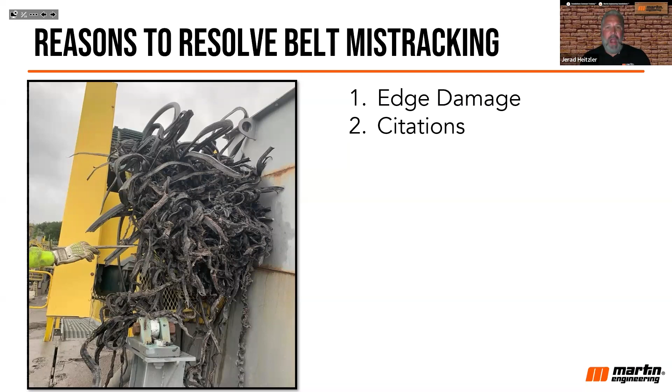Second is citations. We've recently heard from facilities we've consulted for that they're getting citations when inspectors see cords wrapped around the rollers of a conveyor belt. If you're walking along your facility and look at the carrying idler or return roll and see cords from the belt wrapped around that roller - I'm sure nobody here has such an issue, but if you do, there's been recent reports of citations from safety inspectors. We've got to recognize that letting a belt mistrack can cause problems that lead to citations from inspections.

Third, and probably one of the most problematic things with letting a belt mistrack, is the spillage you'll get at the load zone. If that belt wanders off to the side, the material being loaded onto the belt is either going to off-center load or miss the belt completely, causing a tremendous amount of spillage. That spillage causes increased cleanup costs, maintenance costs, and radically increases the cost of operation.

Fourth, the belt can damage the structure of the conveyor. That structure is really critical, and we want to make sure we protect it. Now, I want to share this photo with you - if you look at the bottom right of the screen, let me blow this up for you here, one second, let me get you a better look of this photo.

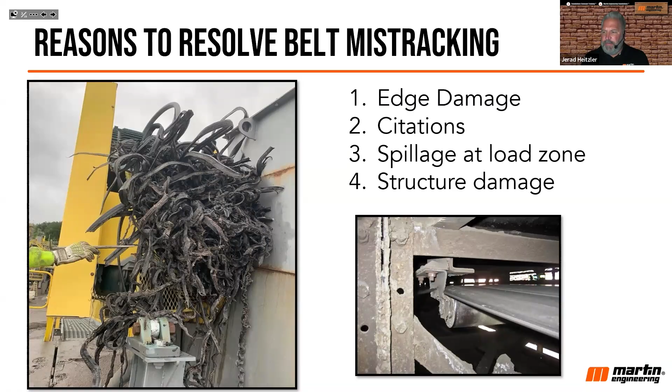You can see in this photograph that this belt has wandered and rubbed into the bracket that holds the return roll. Eventually, that could wear down the bracket completely, causing that roll to fall unexpectedly, which is a huge safety concern. I'll share a story with you that I received maybe a month ago.

There's a company, and I won't say which one - I had one of the safety managers call me up and ask about guarding a return roll. He shared a story of a return roll that fell from the bracket because the bracket was damaged from belt mistracking, and it just narrowly missed hitting one of their workers down below. So we've talked about how belt mistracking can be a problem, but again, we've got to recognize it can be a catastrophic problem.

So let's talk a little bit about solvable and unsolvable mistracking. Now, really, by definition, there's really not instances where a belt can't be tracked. However, I'm going to give you an example of when it may not be in your best interest to solve a belt tracking problem using the procedure that I'll talk about.

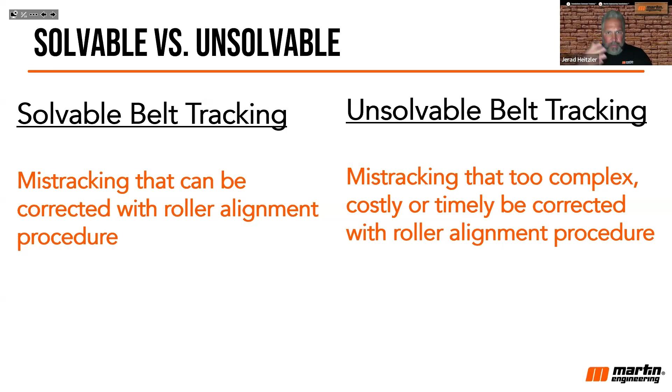Finally, there might be instances where you just can't take the time to thoroughly go through this procedure because of its complexity. So let's talk briefly about the roller alignment procedure.

The first step in this procedure is to identify where the low tension area of the belt is. We want to identify this because the belt, when under lower tension, has more contact with its rolling component. If the belt's under high tension, under a lot of stretch, it doesn't make as thorough contact with a rolling component.

So we're actually more effective with our tracking, we have more influence on the belt when we deal with rollers located where the belt is under low tension. Low tension is always after the drive pulley. This is because the drive pulley grips and pulls the belt, and as the belt leaves the drive pulley, its lagging pushes the belt away. As that drive pulley pushes the belt away, that belt is under its lowest tension.

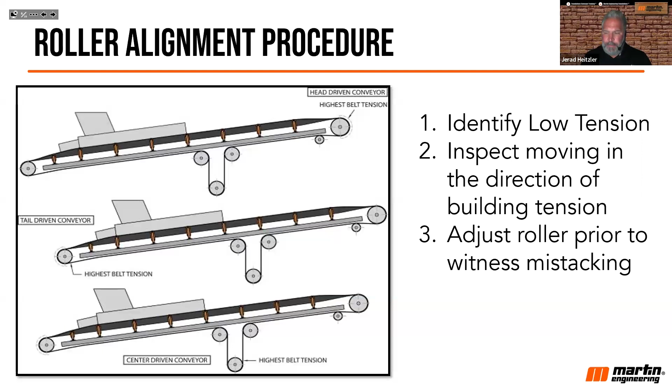The problem with the roller alignment procedure is that it really needs specialized expertise. If your people don't have that knowledge, understanding, and experience of how to use this procedure, what you'll typically find is guys will just go out and start beating on rolls with a hammer to adjust the belt, but two hours later, two days later, that belt's causing another problem with mistracking.

The second problem with this roller alignment procedure is that it needs downtime. If we're running our belts, it's really not a great practice to make these adjustments, because we need to break the plane of the conveyor. So it's best practice to shut the belt down, lock it out, tag it out, make those adjustments, and then restart it. So it's complex.

And then the other thing is that it takes a lot of time and can be repetitive. It can also be minimally effective with complex mistracking.

So I want to talk a little bit about the complexity of belt mistracking. There are 13 different reasons why a belt can mistrack, 13 different root causes. If you've got multiples of those reasons happening at your facility, the belt tracking procedure won't overcome all those multiple reasons you might have going on.

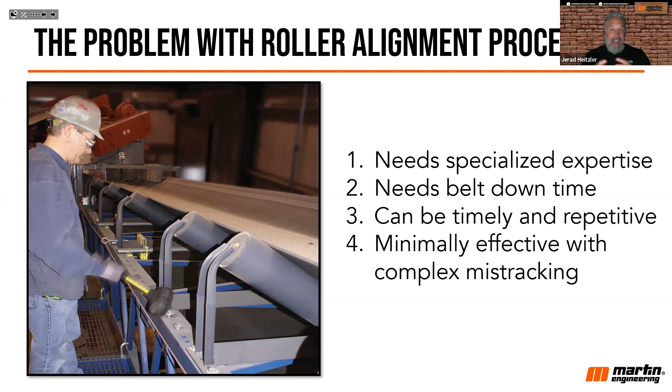In instances where you might have just one or two small problems with your conveyor causing mistracking, this can work. But in a lot of facilities, you'll have 8 or 9 different reasons of the 13 that can cause the belt to mistrack. When the belt mistracking is that complex, this procedure is minimally effective.

This is a photograph that we've used for a long, long time in our live classes, and we're going to go through a little exercise here. In this photograph, this belt was mistracking.

If you don't know what this is, this is a 6x6 piece of lumber that this facility wedged in between the stringer, the structure of the conveyor, and the belt, trying to keep that belt from bumping into the structure. And it actually rubbed a groove through this 6x6 post.

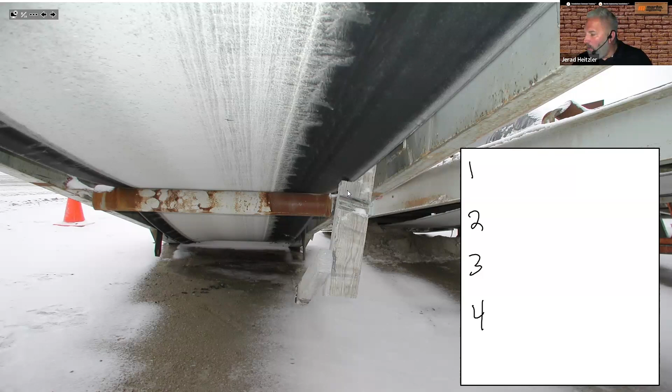But if we look closely at this, we should be able to identify 4 reasons, 4 root causes why this belt's mistracking. Number 1, it's got carryback. Number 3 is camber - this belt's longer on this side than on this side, and that's why you see this droop on the first side. You see how there's more slack in the belt on this side compared to side B? That's camber, because the belt's actually longer on one side than the other.

Number 4, a lot of you got this, you did very good on that one. I'm very happy with you, good job - it's side loading. Number 2, the belt's cupped. So there's lots of reasons, and you can see now with this exercise the complexity of trying to correct the problem. In this instance, you guys came up with about 12 different things that might be causing it to mistrack. You've got to have people with the expertise to recognize and fix those things. I came up with 4, but there might be some other ones.

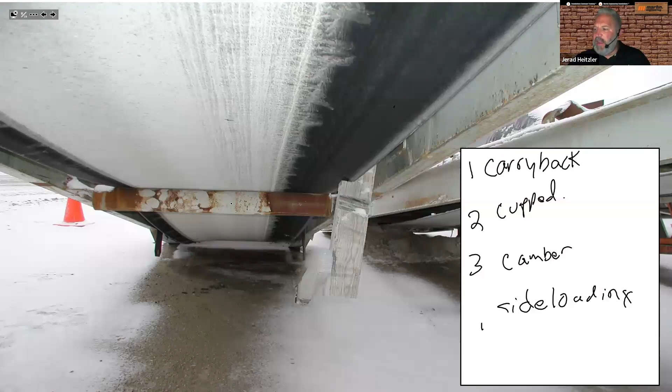Number 2 was a cupped belt. Once you cup a belt, you can't uncup it, so the only solution is to get a new belt. In this instance, the price of the new belt wasn't terribly expensive, so it was only a $20,000 investment. I say only because, as you probably know, belting can get very costly. In this instance it was only a $20,000 belt, however it took 3 men and 1 day to do that installation.

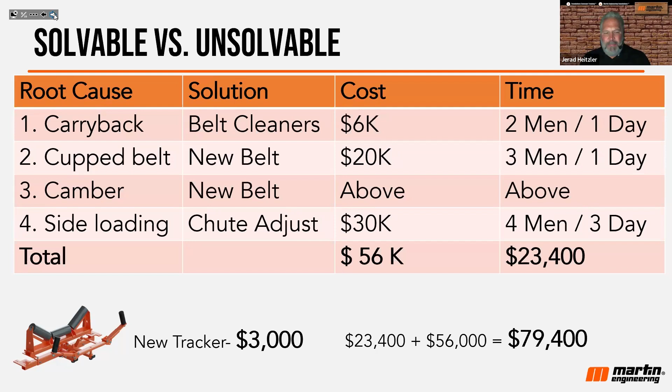All right, so what's the downside of a belt tracker? Well, there's cost involved, there's cost in installing it. You've got to have it come in, you've got to have downtime to put it in, you've got to have guys that can put it in. And then there's maintenance on it, and we'll talk about that. But really, that's the downside.

It's just like any other piece of performance equipment. It solves some problems, but it comes with a cost and some maintenance. What you've got to do is make the business case that these costs are greater or less than the alternative costs. At some point, you'll find that these belt trackers are a better business case than going through all the procedures we talked about.

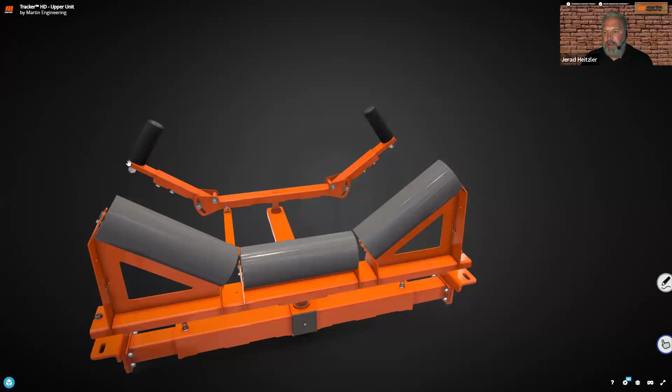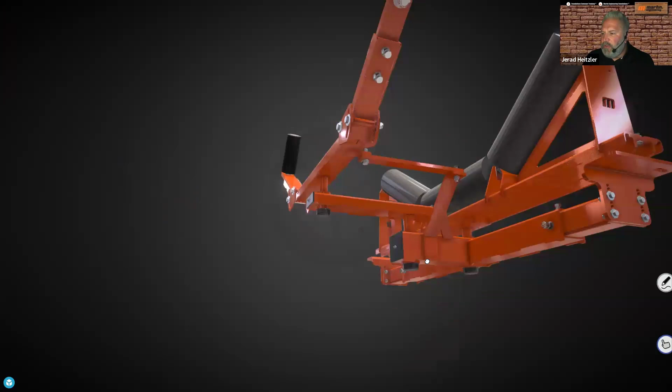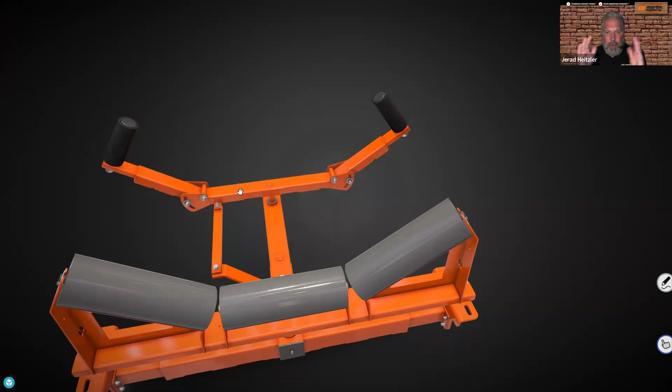But once that roller gets a little bit of touch from that belt, there's linkage right here that sends a message to make an adjustment to this idler. So if the belt touches this roller, this side of the idler moves. In this instance, it would move down the screen, which would send the belt to the left. So this belt is going to constantly move in between these two sensing rollers, and this idler that's bolted onto the unit is going to constantly move, recorrecting the belt.

So there's a really tight tolerance between the belt and the trough here. The belt would lay right in there, and you leave only about a quarter of an inch between the belt and the roller. This is adjustable, so the width here is adjustable.

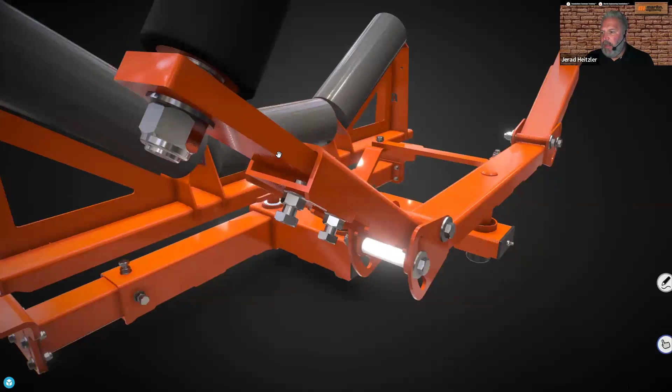Let me show you that real quick. This piece can slide out to your left, and then with these set screws, you can set the width of that belt. You want to install this properly and make sure you've got no more than about a quarter-inch gap between the belt and each of the rollers.

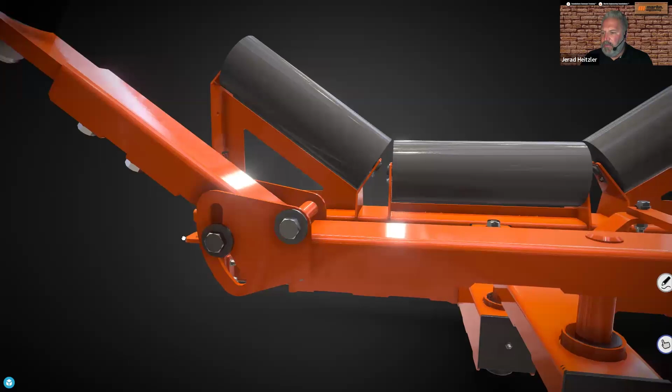This is adjustable for different trough angles. It's pretty simple - if you've got 20 degrees, 35 degrees, or 45 degrees, you can adjust for different troughing angles with this right here. It's pretty simple to maintain.

You want to make sure material doesn't build up so much on this thing. If it gets caked with material, it's not going to function, so you want to make sure it's kept reasonably clean. The best way to do that is to make sure you're doing your job reducing carry back with belt scrapers, but you can wash this off periodically if it gets built up.

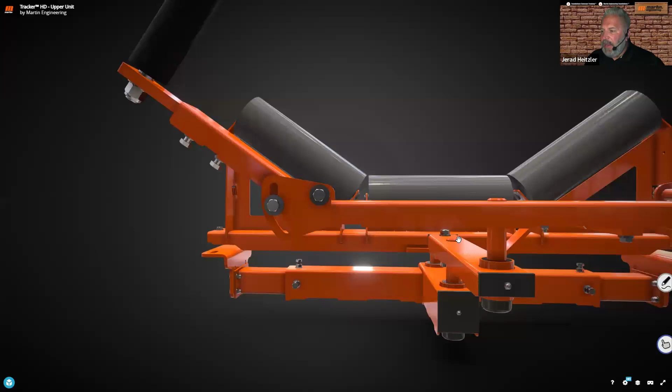The other thing it needs is a little bit of grease every once in a while. You can see there's a Zerk right here, and there's another Zerk. Let me get it here for you - back a little bit, so there's your second Zerk right there. And then there's another one on the back side right there. So those three grease points need to be greased.

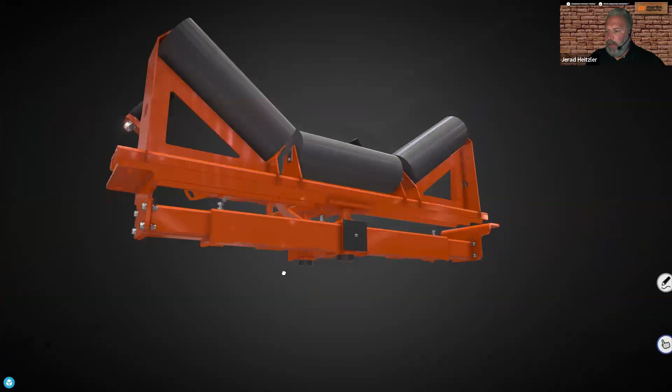We do make a grease kit where what we basically do is bring a line out to the side of the conveyor, and that line is connected up to those three Zerks. You can grease it just from one point from the stringer without shutting anything down. So it's safe, quick, and easy.

What these units are really meant to do is reduce - this is important, gang - these tracking devices are intended to reduce your expertise, time, and money needed to solve a belt mistracking issue. This is for those unsolvable cases. This is tracking the untrackable belt when it's just too complex, too costly, or you don't have the time to do it. This is a better solution.

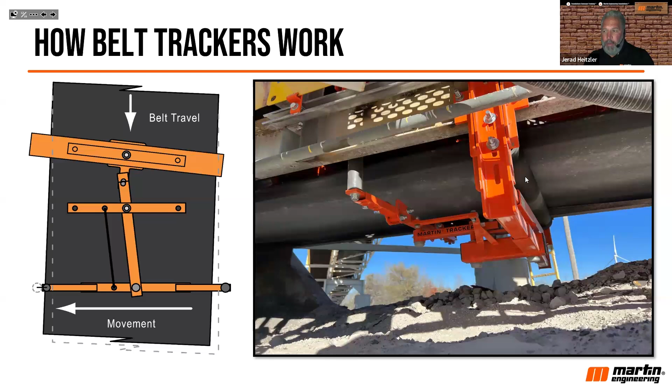What we'll recommend is that the roll be rubber lagged, because those rubber coated rolls will grip that belt a lot better. There's some specifications on duty rating. There's different duty sizes of these trackers, and that duty rating has a standard, a heavy duty, and an extra heavy duty, and that depends on the speed of the belt and the thickness of the belt.

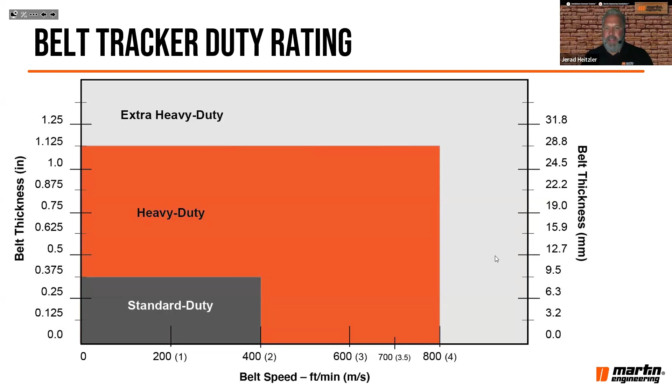Most applications in mining, cement production, or heavy aggregate are going to take the heavy duty. In some smaller applications, maybe grain or thin belts running pretty slow, the standard duty is a better option. But we also have an extra heavy duty that's going to satisfy belts that are over 800 feet per minute and thicker than an inch and a quarter or so. We can help specify that - this is not a task that should be put on you.

Let's talk a little bit about the effective placement of these trackers. We'll talk about their reach as well, but I want to talk about where they should be placed. Somebody mentioned you might need 2 - yeah, you might need 2, you might need 3, you might need 5. It kind of depends on where the belt's mistracking and how significant the mistracking is. If I was going to put these on a facility, I would try to understand what's causing the belt to mistrack and then use one tracker to see if I can correct that. If that doesn't do it, or I know for certain there are a couple of locations definitely causing a problem, I might add 2 or 3 if I can identify them early. However, I wouldn't apply a bunch of trackers without trying to use as minimal a number as possible, because of the added cost of adding trackers unnecessarily.

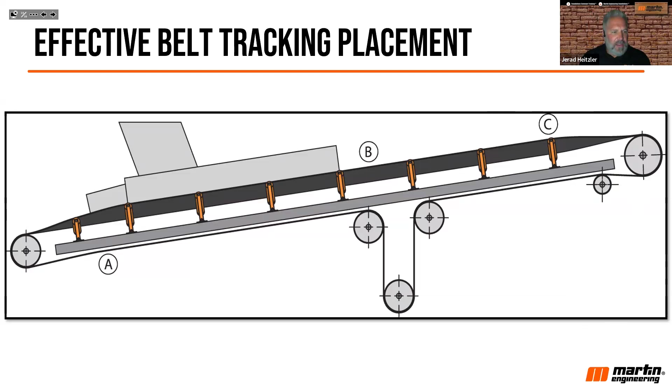I've got one more thing I want to share with you, and that's the distance these trackers have in effectiveness. These trackers can't completely eliminate belt mistracking - this is important to note. If your belt mistracking is really complex, you might need multiple units. But if it's incredibly complex, these can't overcome every belt mistracking problem. So if you've got belts wandering off to the point where they're missing idlers completely, and I've seen that happen, these may not completely correct it. They might make an impact, they might make it better, but they might not completely eliminate it.

They have some limitations. One of their limitations is the reach that they have - their reach is about 70 to 100 feet. The further you get from 70 feet, the less effective those belt trackers can be. So if you've got long conveyors, you might want to take into consideration that you might need multiples if the mistracking is wildly significant.